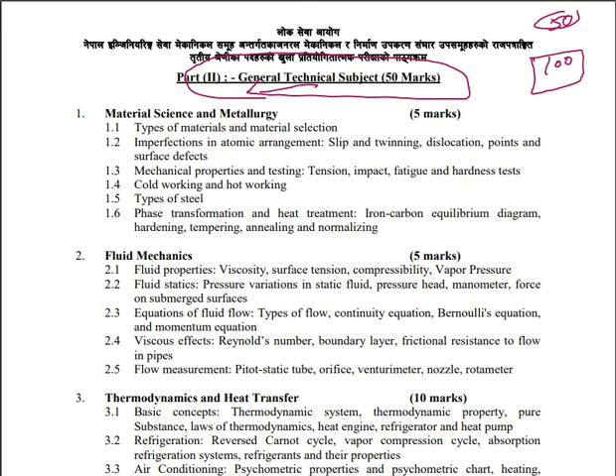You can go through that. These are the main general technical subjects worth the remaining marks. In total, this paper will be 100 marks: 50 for general awareness and 50 for general technical subjects. Now let us discuss in detail all the subjects of mechanical engineering.

5 marks are from Material Science and Metallurgy, which has 6 chapters: types of materials and material selection, and the second chapter covers imperfection in atomic arrangement. You can go through all these chapters directly.

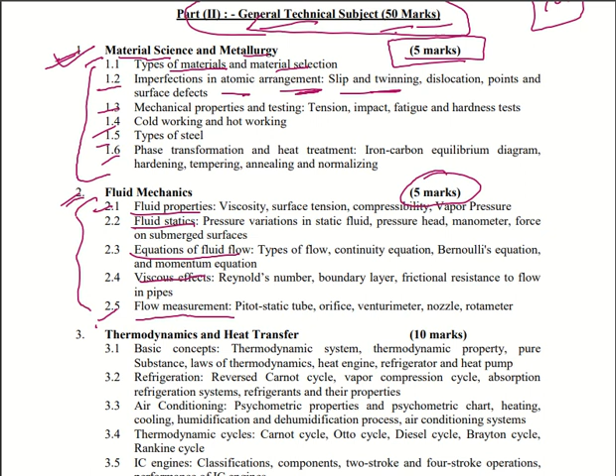The second subject is Fluid Mechanics, also worth 5 marks, with 5 chapters: flow measurement, viscous effects, equations of fluid statics, and fluid properties. These are very simple topics worth only 5 marks, so you should read briefly about all 5 chapters. For MCQ questions as well as written questions, you have to read in good detail.

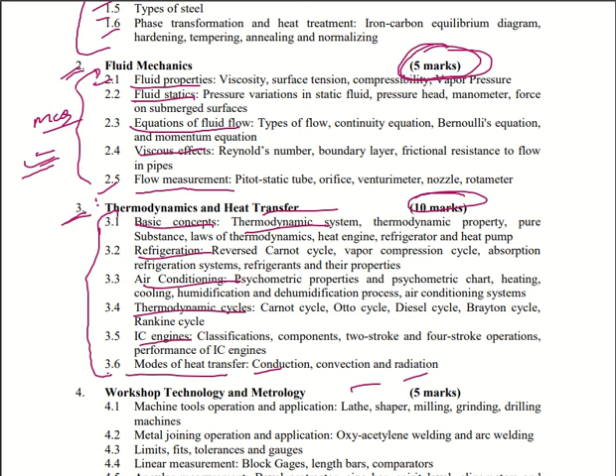Thermodynamics and Heat Transfer is the third subject, worth 10 marks, with 6 major chapters: basic concepts of thermodynamic systems, refrigeration and air conditioning, thermodynamic cycles, IC engines, modes of heat transfer, and conduction, convection, and radiation. You need to know the basics for MCQs on these two subjects.

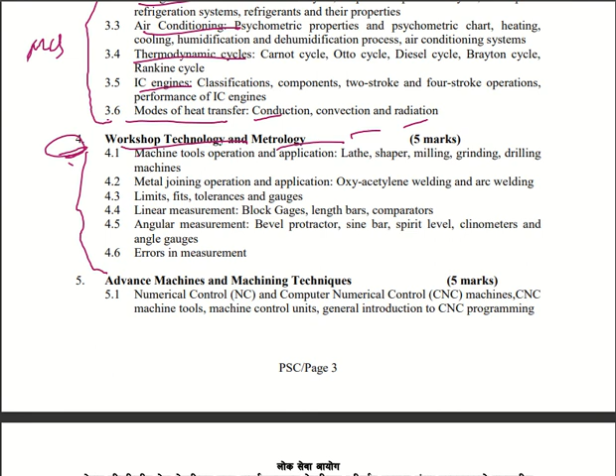The fourth subject is Workshop Technology and Metrology, which has six major topics. The fifth one is Advanced Machines and Machining Techniques.

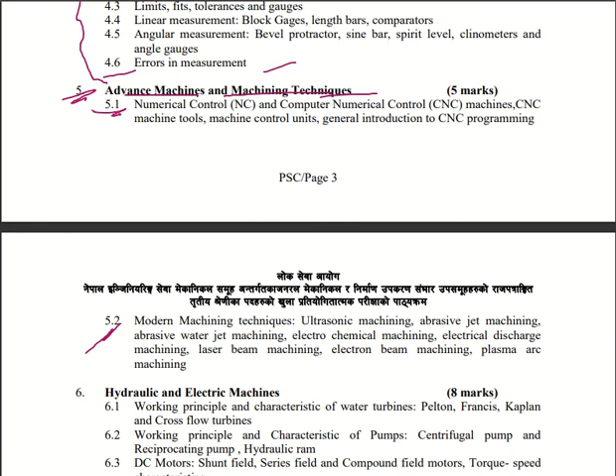Here there are two major chapters, so you can go through this. The sixth subject is Hydraulic and Electric Machines, containing five major chapters.

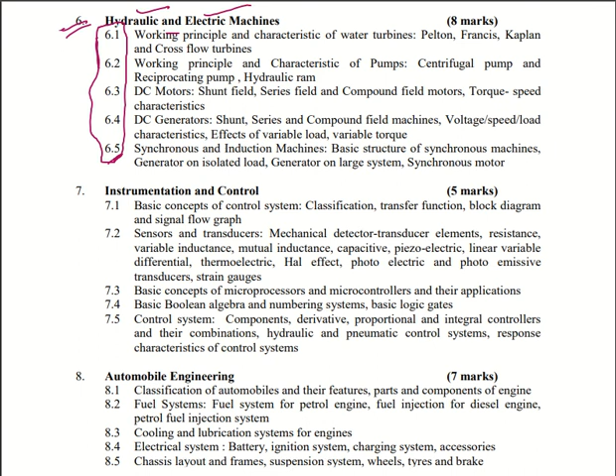The seventh subject is Instrumentation and Control, with five chapters worth 5 marks. The eighth one is Automobile Engineering, worth 7 marks, with 8 chapters.

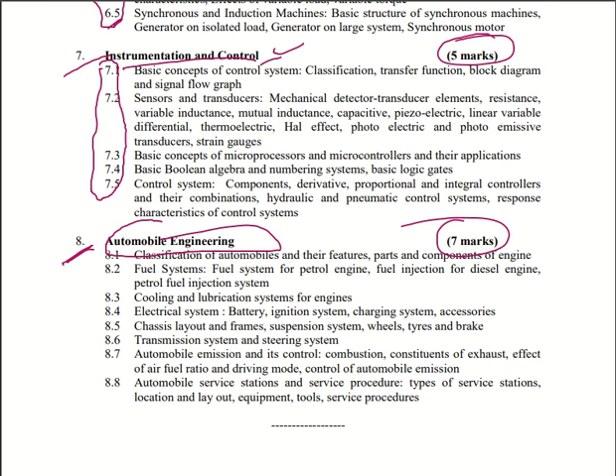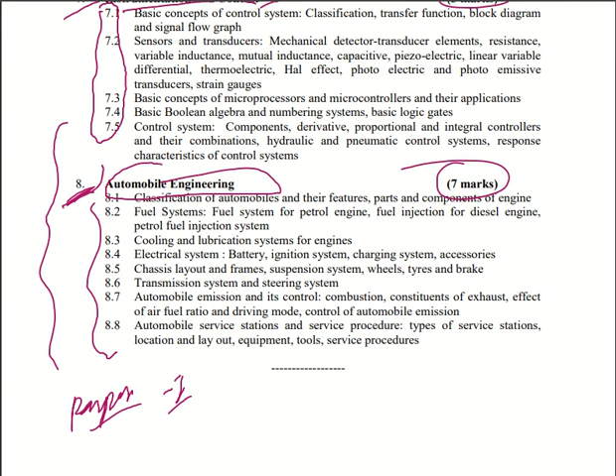With this we'll end the first paper. You can go through the syllabus, and we'll discuss each subject in detail in the next video, where we'll cover Paper 2. Thank you for watching. Thanks.